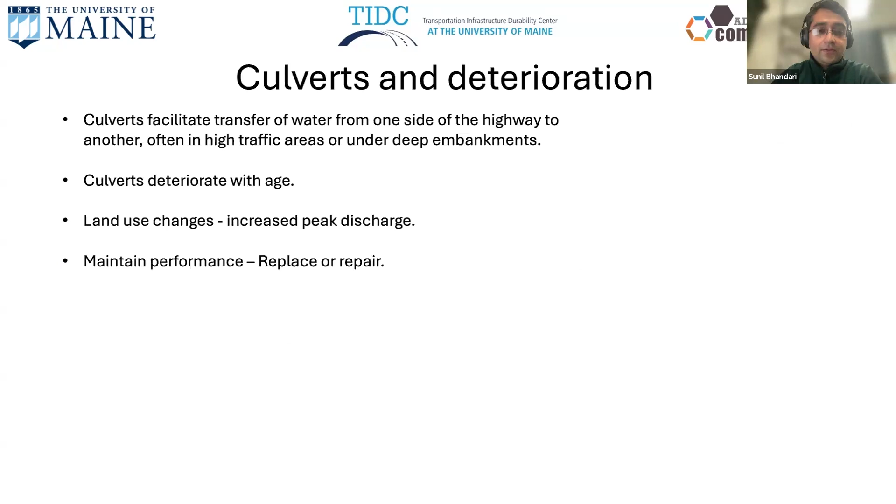These culverts are designed for a certain discharge capacity, and the deterioration reduces the discharge capacity of the culverts. And the land use change, the increased stormwater drainage in recent years, and the increased rainfall have caused the discharge requirement of the culvert to be increased. So because of the deterioration of culverts and increase in discharge requirements, we have seen some culvert washouts recently in Maine.

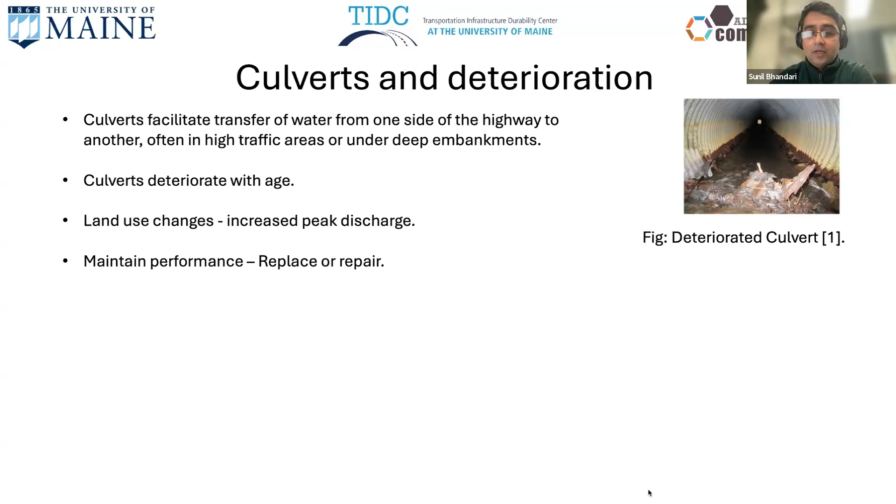This one was at Long Dam Road, a Flagstaff in Maine. This one was at Glenburn in Maine in October 22. And this one was in South Paris, Maine in July 2023.

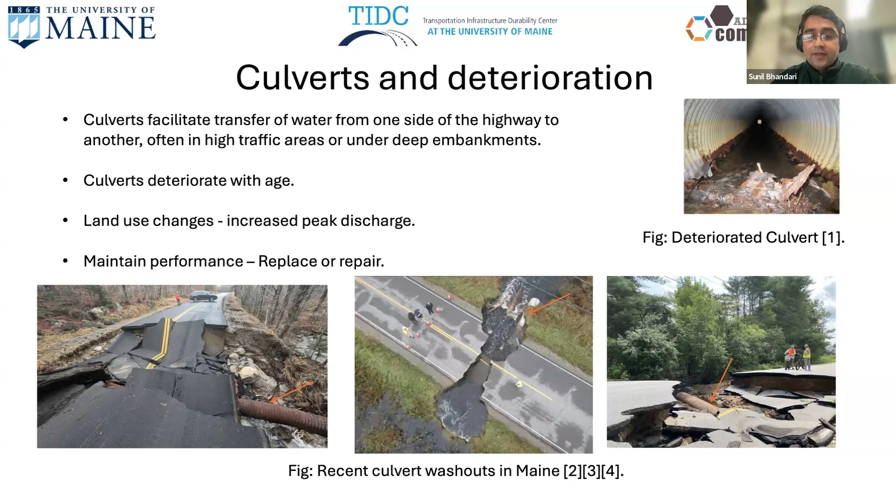So in order to avoid washouts and highway traffic interruptions, we need to repair or replace these deteriorated culverts. And replacing is expensive. We have to dig out the old culvert and manufacture a new culvert, place the new culvert, and repave. And it includes traffic stoppage, interruptions. So replacing is an expensive option.

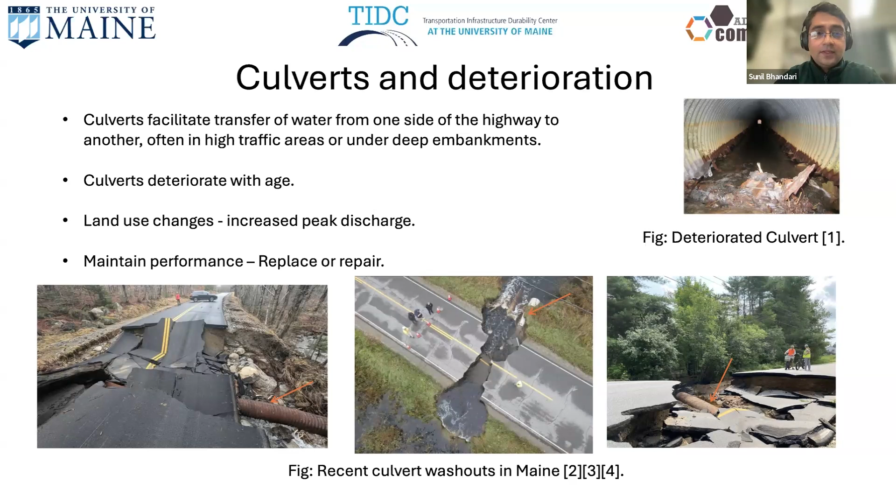As an alternative to replacement, the culverts can be rehabilitated using slip lining. Slip lining is a trenchless repair technology. A smaller diameter pipe is inserted inside the existing culvert and the gap is grouted. But since the rehabilitated culvert with the slip liner has a smaller cross-section area, the discharge is reduced compared to the original design discharge. This decrease in discharge can be compensated by reducing inlet and outlet losses.

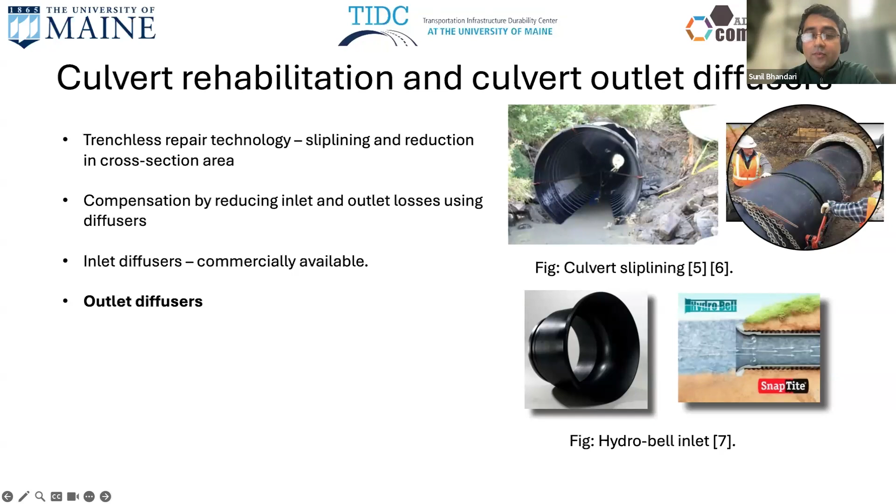The diffusers streamline the flow of water and reduce head losses. Inlet diffusers like Hydro Bell, shown here in picture, are commercially available and have been successfully used to improve discharge. On the downstream side of things, outlet diffusers can be used to reduce outlet losses and improve culvert performance. The work I'm going to present today focuses on outlet diffusers.

So culvert outlet diffusers are gradually flared culvert outlet sections. They can increase the culvert capacity and compensate for the losses due to liner retrofit. They also reduce outlet flow velocity and minimize erosion. And they perform best during floods when both inlets and outlets are submerged. And they are used as a part of trenchless technology for highway culvert rehabilitation. It's used as a part of a larger project, which includes slip liners, inlets, together with weirs.

So the figure here shows the diffuser, this is a diffuser that was at Mattawamkeag. This diffuser was made of fiberglass with fiberglass reinforcement, and this was made using wet layup. And the general dimensions are shown here of the diffuser.

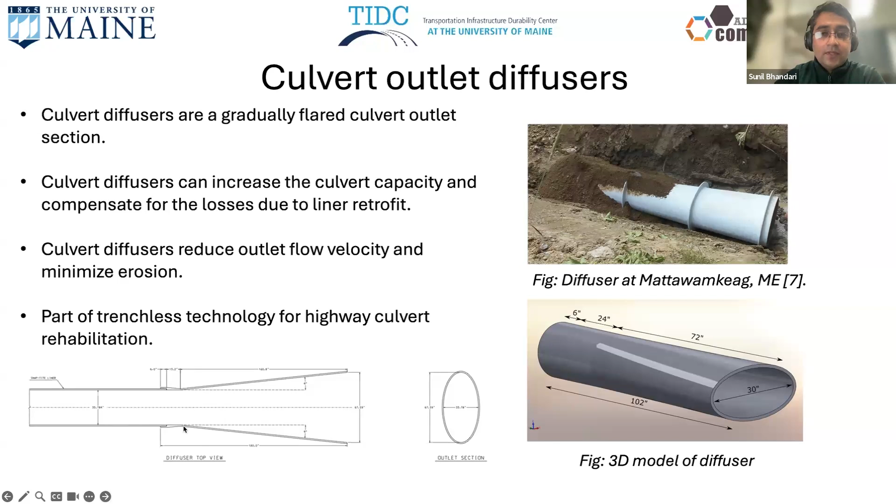And similarly, this one was used. This is a plan view of the diffuser used in Exeter, New Hampshire. And the basic geometry is it's a flared pipe, if you look at the plan view, top view. So let's go to the next slide.

So let's look at a preliminary CFD simulation to inform how diffusers can affect the flow through culverts. In the simulation, we assume the inlet head of 7.5 feet, outlet water level of 3.3 feet, and both cases have a conical inlet, and one is without the diffuser at the downstream, and another is with diffuser, and the culvert diameter is 34 inches. So without the diffuser, the simulation shows that the flow discharge is 120 cubic feet per second, and with diffuser, it increases to 155 cubic feet per second.

And the thing to note here is that with diffuser, the pressures are lowered inside the culvert pipe, and they go to a negative pressure, but the velocity is increased in the culvert. But as it reaches the diffuser section, the velocity decreases, and compared to the case without diffuser, the velocity is lower at the outlet. So basically, it reduces pressure head and increases velocity head to increase the flow.

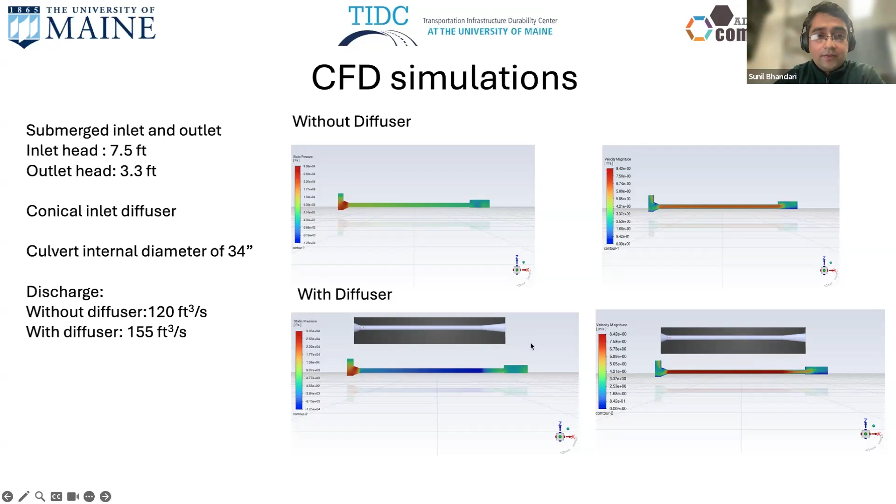So why we chose to use large format additive manufacturing to make these culvert diffusers? As you can see, the geometry of each diffuser is unique and depends upon the culvert and the site conditions. The geometry is also non-prismatic with the flared section on one end and circular section on another end. And the design loads are relatively low compared to other highway structures because it is not directly under the traffic, and the backfill is lower compared to the actual culvert. The diffuser has lesser loads, and it offers significant cost reduction to other currently used methods.

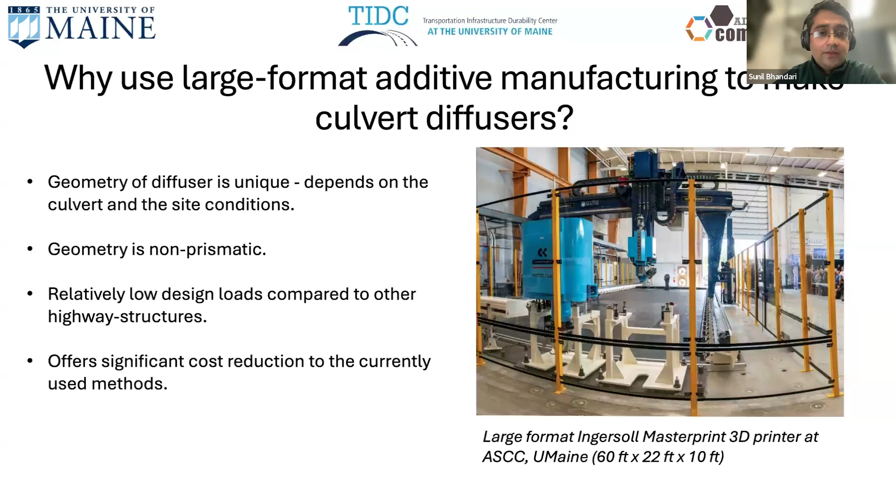So we use thermoplastic extrusion-based additive manufacturing. So the idea is to take thermoplastic pellets, melt them, and extrude them from a nozzle and deposit layers of them to make a part. So this printer uses a single screw extruder, and it is mounted on a CNC gantry system. As you can see, the 3D printed part has multiple layers, and each layer has multiple beads.

The parts are weaker across the layers where there are joints, and mechanical properties across the joints are comparatively lower. The manufactured part is orthotropic, and it has lower mechanical properties compared to parts manufactured using other processes like injection molding.

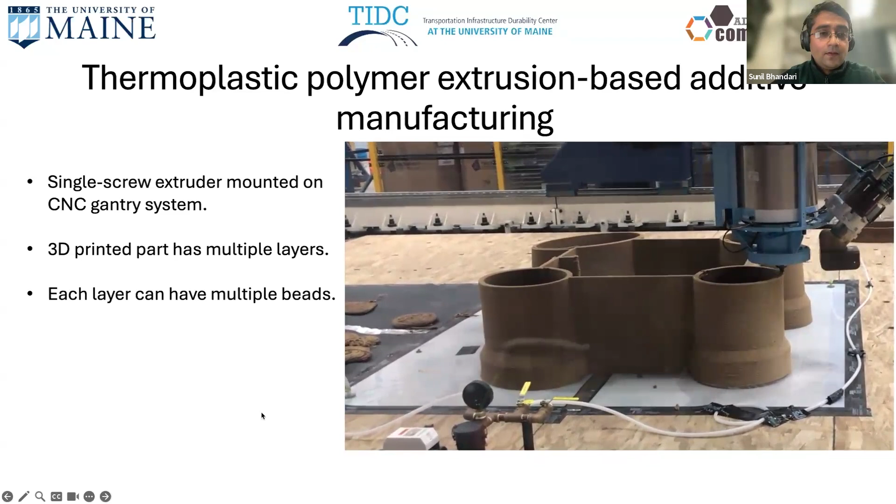Many of us might be familiar with desktop 3D printing, which uses filaments and comes in desktop sizes. But compared to that, large format additive manufacturing has very high extrusion rates. The machine we saw earlier had a maximum extrusion rate of 150 pounds per hour, and since that video, we have made some modifications, and now it can do up to 400 pounds per hour. And there's a newer one being made that can do up to 1,000 pounds per hour.

And similarly, the build envelope of large format 3D printers is much larger. As you saw earlier, for the Ingersoll machine, it was 60 feet by 22 feet by 10 feet. The feedstock material are pellets. And since a large volume of polymer is being heated, there are multiple heating zones. In the Ingersoll machine from the previous slide, the extruder has 4 heating zones. This helps gradual and consistent heating of polymers.

Also, the beads extruded in large format 3D printing are bigger, so the surface area to volume ratio is lower. So since the beads are thicker, it takes longer to cool down, which brings us to the idea of layer time. Layer time is the time within which we need to deposit a single layer. If we take too much time, the layer will cool down too much and the layers don't bond well together. If we deposit too fast, the layers have not become solidified enough to support the weight of another layer above it. So this limits the extrusion rate.

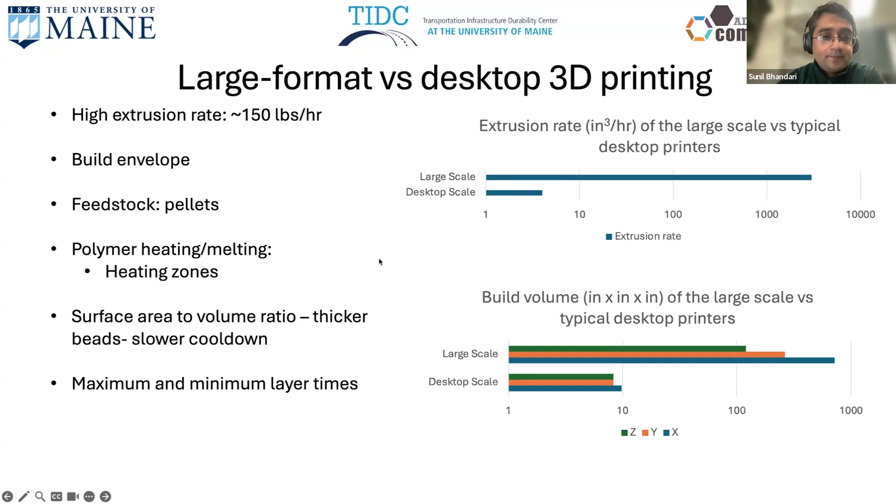So the objectives of this work were to explore the feasibility of using a large format 3D printer to manufacture culvert diffusers, and to design, manufacture, install and monitor 3D printed diffusers in 2 phases. The first phase was a diffuser prototype for experimental site demonstration. The second phase was a diffuser for resilient highway culvert rehabilitation. We also wanted to assess the use of 2 different polymer systems, wood flour PLA, which is a bio-based biodegradable system, and carbon fiber ABS, which is a petroleum-based system, and see how they work for manufacturing culvert diffusers.

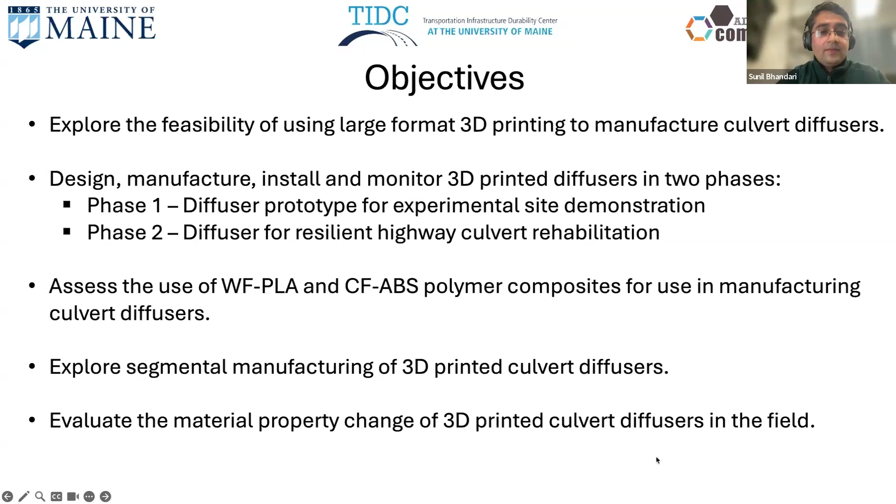We also wanted to see if we can do segmental manufacturing of the 3D printed culvert diffusers. This is important because with segmental manufacturing, we can make parts that are larger than the build envelope of the 3D printer, and it also makes them easier to transport. And we also wanted to evaluate the material property changes of 3D printed diffusers in the field. So we wanted to see how the mechanical properties degrade over time, and if that's acceptable for the lifespan of the structure.

So comparing the two phases, the first phase was owned by Maine DOT. The diffuser was placed on a rural road in Thorndike, Maine, and we manufactured it in October 2020. There was already a fiberglass diffuser placed at the site. We wanted to see if a 3D printed diffuser can perform the same way. So it was a temporary trial to monitor the hydraulic performance. It was installed in 2021.

We used wood flour PLA bio-based material, and the printer used was the large format Ingersoll MasterPrint 3D printer. The part was 8.5 feet long and 2.5 feet wide at its widest point, and it was around 410 pounds of material. It was divided into 4 segments, and we printed the 4 of them at once.

For phase 2 of the project, the owner was the New Hampshire Department of Transportation, and it was installed in Exeter, New Hampshire. We manufactured it in May 2022, and the goal was to rehabilitate a corroded CMP culvert with a liner and diffuser, and the diffuser was part of the larger rehabilitation project. We installed it in summer 2023. The material used was carbon fiber ABS, which is a more durable, petroleum-based material, suitable for a structure that is required to last for a long time.

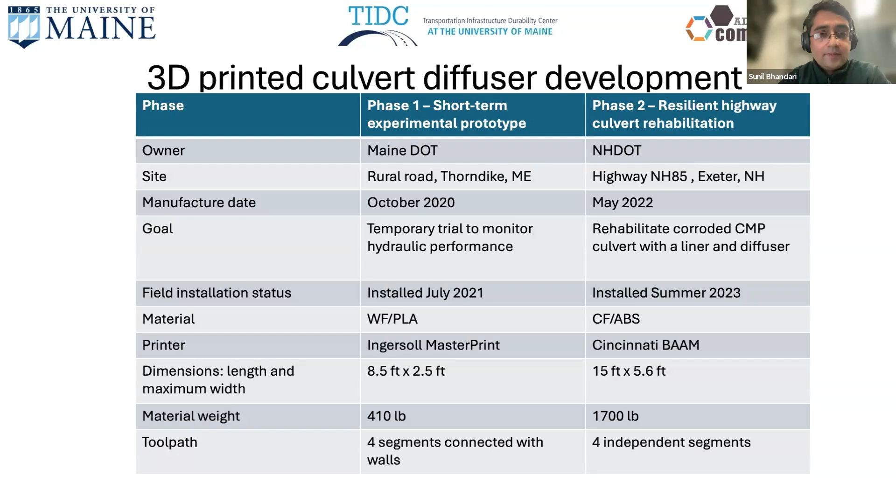So for the phase 1, this is the 3D model, and the circular end here connects to the outlet of the culvert, and the elliptical end, flared end discharges water downstream. The dimensions are 8.5 feet long and 2.5 feet wide at the flared end.

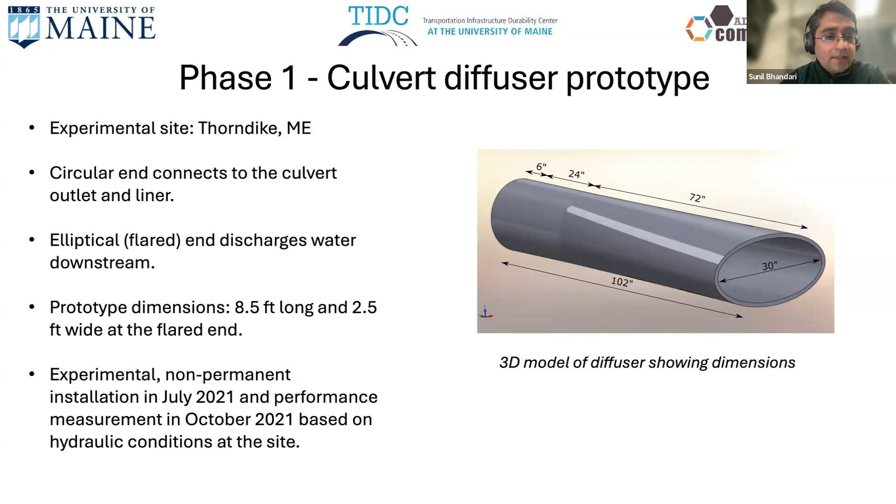This was experimental non-permanent installation that was installed in July 2021, and the measurement of the flow was made in October 2021 based on the hydraulic condition at site. So for phase 1 material selection, we used PLA wood pellets, which is a biodegradable material for this trial project. The diffuser was experimental and temporary, so we used bio-based material. For long-term use projects, we would go with non-biodegradable polymers.

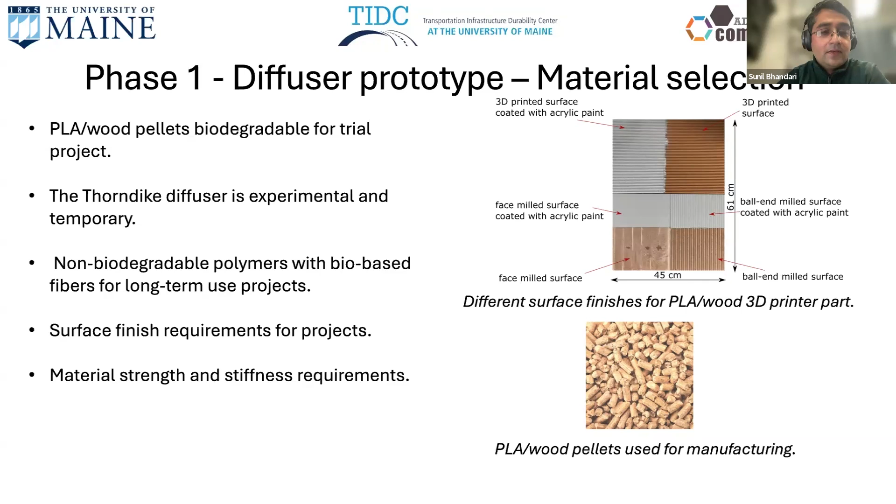And for 3D printed part, we can do post-processing, CNC machining to get different surface finishes. But for these diffuser projects, we deemed that the as printed 3D printed surface shown here was acceptable. And there are also material strength and stiffness requirements, so the manufactured part with these materials can withstand the loads. And for this project, the strength and stiffness offered by PLA wood polymer was considered sufficient.

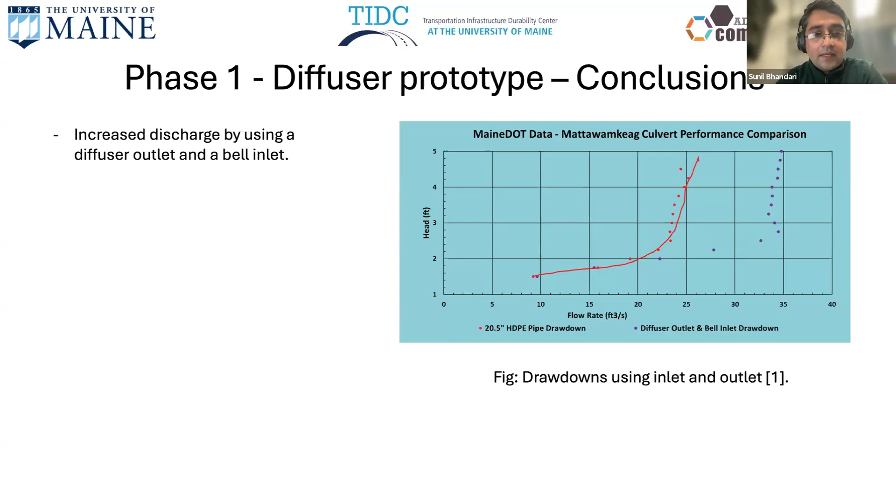And based on the measurements done at the Thorndike site, it showed that the flow was increased by about 40% based on the water levels, comparing just the HDPE pipe and the HDPE pipe with diffuser outlet and bell inlet.

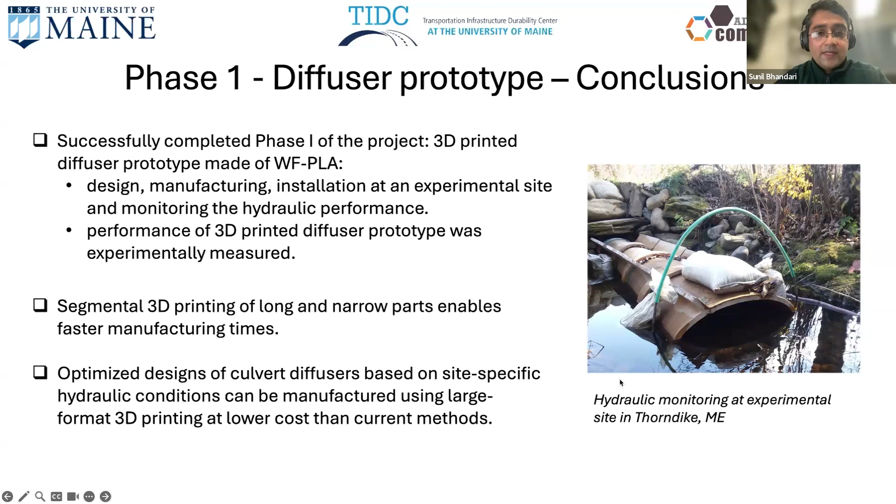So for phase 1, we successfully completed phase 1. We designed, manufactured, installed the 3D printed diffuser at the site and monitored the hydraulic performance. We also saw that segmental 3D printing of long and narrow parts allowed us to have faster manufacturing times. And optimized design of culvert diffusers based on site-specific conditions could be manufactured using large format 3D printing at lower cost than the current methods, which is wet layup of fiberglass. So the figure here shows the experimental diffuser at Thorndike that was installed there.

For phase 2 of the project, it was diffuser for culvert rehabilitation. It was part of a larger rehabilitation project of the culvert carrying Rocky Hill Brook under New Hampshire 85 Newfields Road, Exeter, New Hampshire. The culvert had deep embankment of about 20 feet, so the replacement was considered very costly. The site posed challenges in rehabilitation due to pipe capacity, and just slip lining was not good enough because it reduced the capacity. Also, there were stream crossing and wetland permitting rules that must be met to a maximum extent practicable.

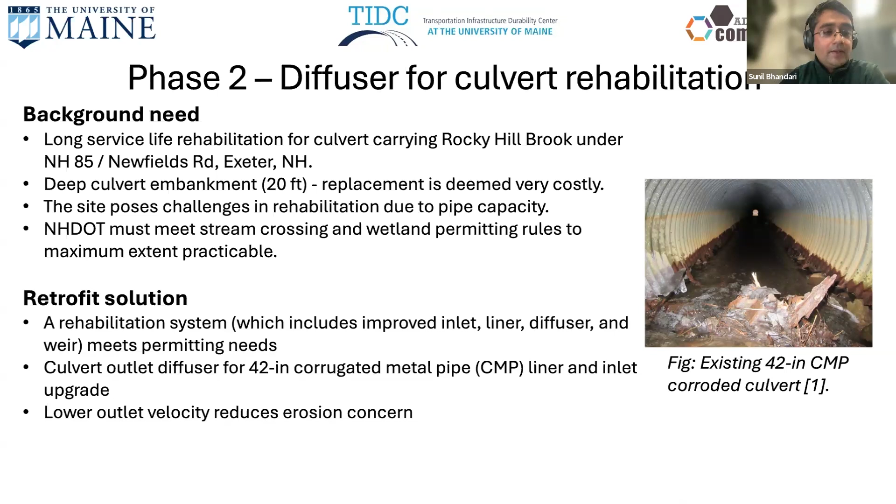So a solution was a rehabilitation system which included improved inlet, liner, diffuser, and the weir. So the culvert outlet diffuser for 42-inch corrugated metal pipe liner and inlet upgrade was proposed, and it also lowered outlet velocity, which reduced erosion concern. So hydraulic design defining the internal profile and cross section was provided by New Hampshire Department of Transportation. The interior dimension and geometry was defined. The cell shape was defined. We needed to make a decision on the required thickness of the diffuser.

So we characterized the mechanical properties of the 3D printed part experimentally and generated modulus in different directions. Remember, the material is orthotropic in nature. It has different properties in different directions. So we characterized the material properties and performed the finite element analysis with shell modeling and laminate analysis. And we checked the stresses and deflections. The stresses on the diffuser due to self weight and soil pressure are shown in the figure. We also checked buckling limits. The design was controlled by buckling.

So if we just printed the part with one bead wide layer, we had a buckling ratio of 1.63 for the properties of as printed materials. So we wanted the buckling ratio to be higher because the material properties are expected to deteriorate over time, so we had to go with two 0.8-inch wide bead layers.

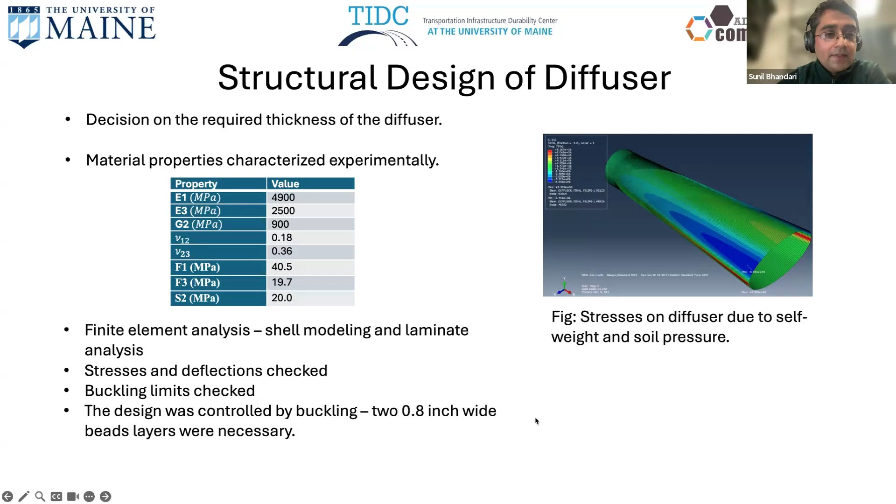So we designed the joints and we manufactured the culverts using the BAAM printer here at the Composite Center. We used carbon fiber ABS material because it's more durable, and it was deemed suitable for longer lasting structure. It wasn't feasible to print the whole part at once in BAAM because it's long. So because of the height restrictions, we printed the part in 4 different segments, one part at a time. And the segments were assembled at site. We transported them to site, and New Hampshire DOT employed a contractor to assemble it.

So the printing parameters for the first segment were: the polymer was extruded at a temperature of 238 degrees Celsius. The layer time for that part was 3 minutes 5 seconds, and bead width was 0.83 inch.

Layer height was 0.2 inch, and because of the layer time restrictions, we could only extrude at 40 pounds per hour. Total time elapsed for printing was 11 hours and 42 minutes for just the first segment, and the total time for the 4 segments was 53.5 hours.

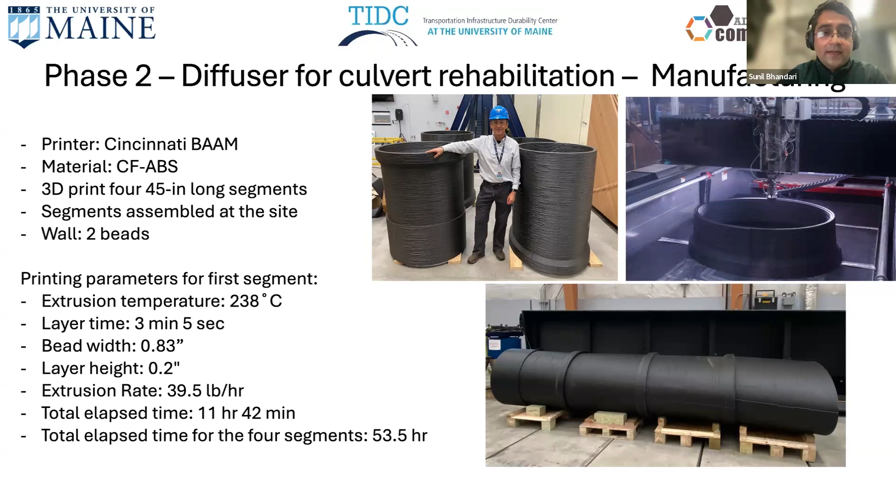So this diffuser was installed in Exeter in New Hampshire in August 2023, and this is a 3D model of the diffuser, and it has 4 segments connected with these design joints, and this is the outlet section.

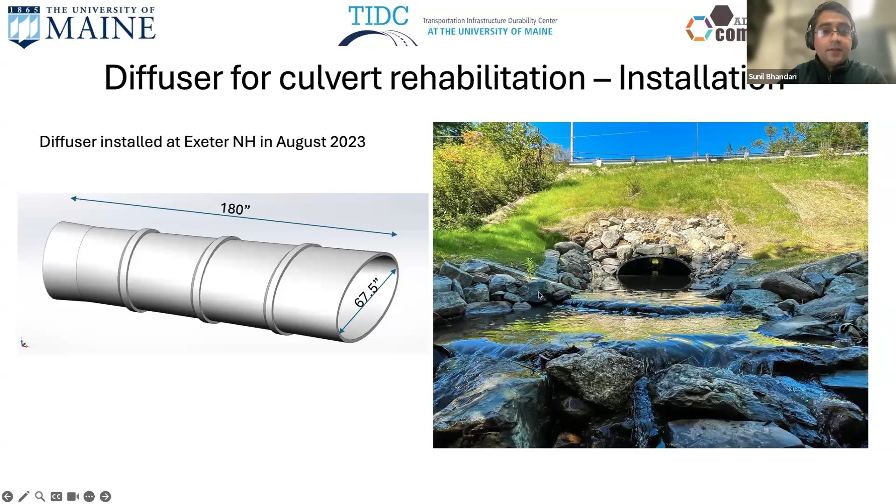So another aspect of this study was to study the durability of the polymers exposed to the conditions at site. So we wanted to see how long these parts will last with acceptable performance. So we conducted accelerated lab testing for durability, moisture conditioning, and freeze-thaw cycles. Accelerated water immersion tests based on the principle of time temperature superposition were performed.

The idea is that by increasing the temperature, we increase the rate of degradation of the polymers in lab. So the assumption is that similar degradation will happen in a shorter period of time. So slow degradation over long time is equivalent to fast degradation over short time. So years of degradation in field is simulated by exposing specimens in lab to similar conditions but elevated temperature.

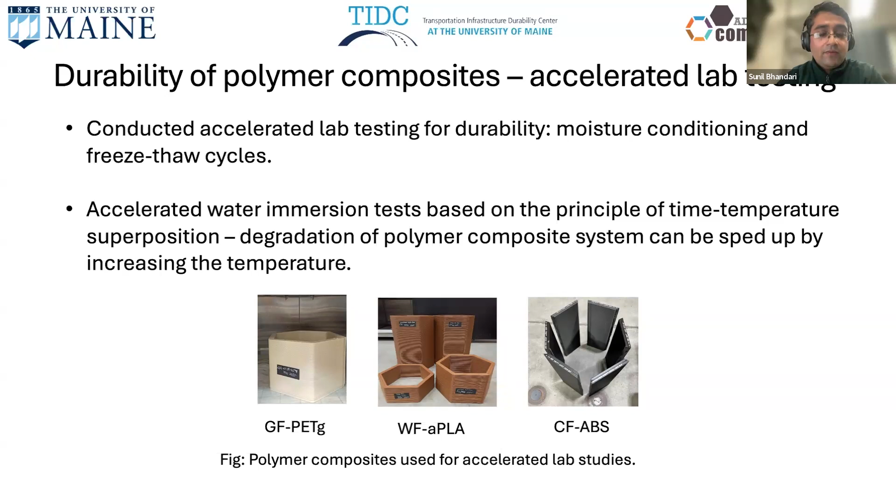So we did the accelerated testing for 3 different polymers: glass fiber reinforced PETG, wood flour reinforced amorphous PLA, and carbon fiber reinforced ABS. So the results show that the reduction in mechanical properties of carbon fiber ABS and glass fiber PETG after 90 days of accelerated water immersion at 70 degrees C were within acceptable limits. There was very small loss.

For WFPLA, there was significant reduction in mechanical properties, so it's not the best polymer system to use for parts which experience long-term exposure. Similarly, CF ABS and GFPETG worked very well and showed no significant reduction in mechanical properties after 9 cycles of freeze-thaw cycling. And again, WFPLA showed significant reduction in mechanical properties.

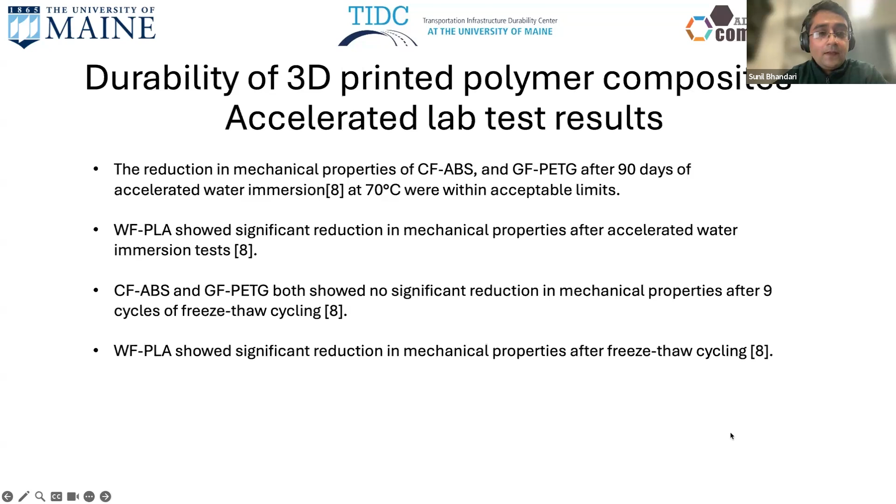We have also placed witness panels at site, which we plan to go back and retrieve and test in lab and see if they have reduced mechanical properties and by how much if they have. These are at site, and we plan to get them next year.

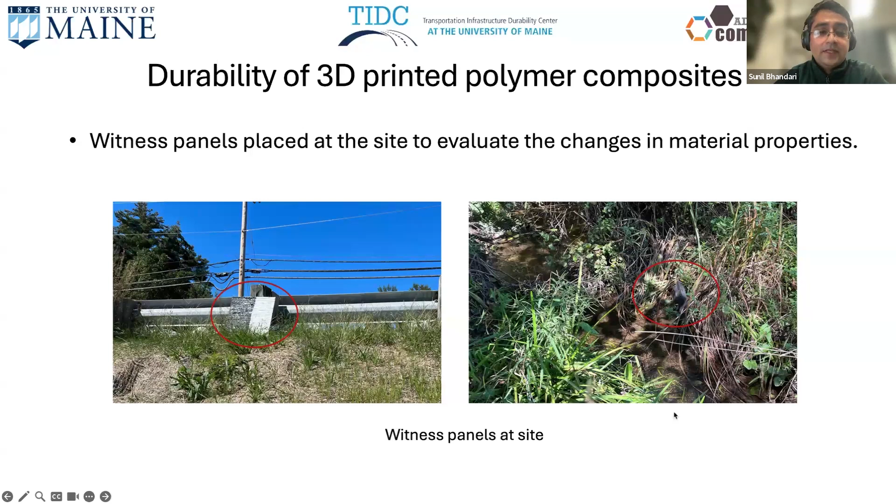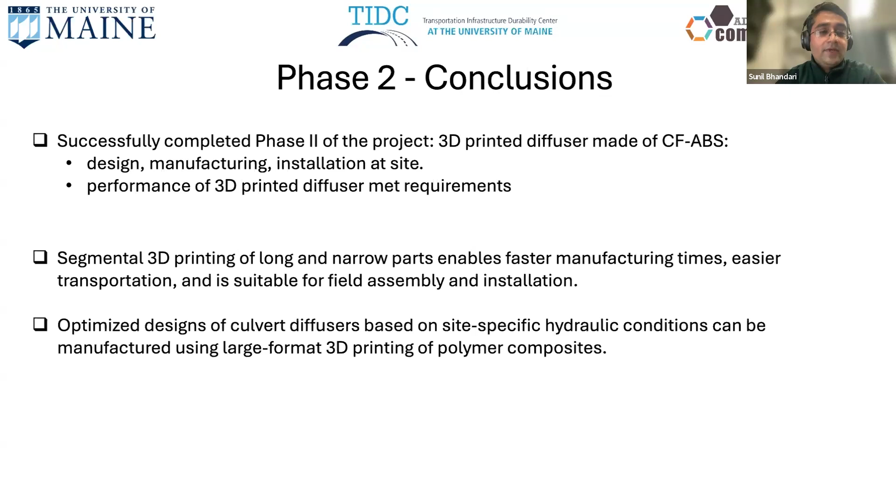So the conclusions for phase 2 of the project: we successfully completed phase 2. We designed, manufactured, and installed the diffuser at site. We saw that the performance of the 3D printed diffuser met the requirements. Segmental 3D printing was effective, and it allowed faster manufacturing time, easier transportation, and the produced segments are suitable for field assembly and installation. And we also found that optimized designs of culvert diffusers based on site-specific hydraulic conditions can be manufactured using large format 3D printing of polymer composites.